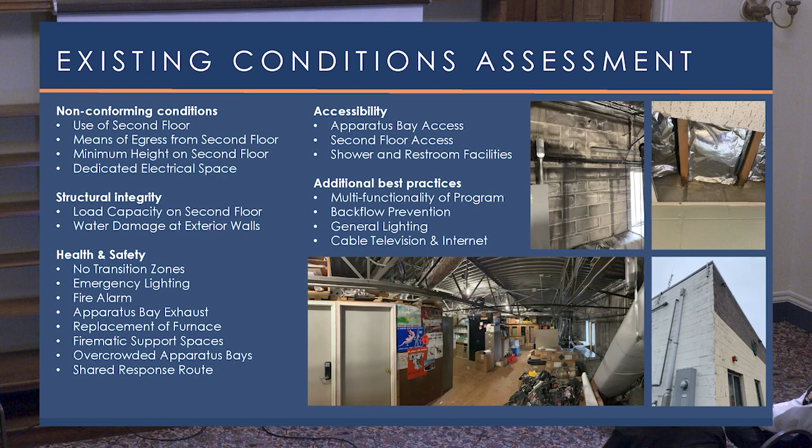So from a site layout standpoint, the current fire station exists on a shared lot with the highway, water and sewer, as well as access to some residential and commercial tenants in the rear. So there's a lot of circulation that's occurring on site.

From a fire standpoint, as one of the only public safety services that respond from the site, police departments are slightly different. Most of the time they're responding from the road. So fire station, you're responding from the site. So it's critical that we maintain a clear path for those apparatus to safely exit the site and not cross other public, other trucks that might be circulating in and around that site. That's not only a safety concern for those who are also driving on site, but also just to ensure a timely response.

We also noticed there's really minimal parking for the station and call firefighters, so full-time and call, to really support that quick response. And that is really also tied to ensuring that operational safety. Getting to the station and allowing a safe response from the station is all tied together.

The main entry is currently concealed kind of on the side of the building, and if you've never been there, it's a little difficult to know where it is, to know where to go. As a fire station, it is common that you have a walk-up medical or someone goes right to the fire station if they can't get to another medical service or hospital. So making sure that that public entry is clear and identifiable and that there's public spaces right in front of it is also a best practice from a fire station standpoint.

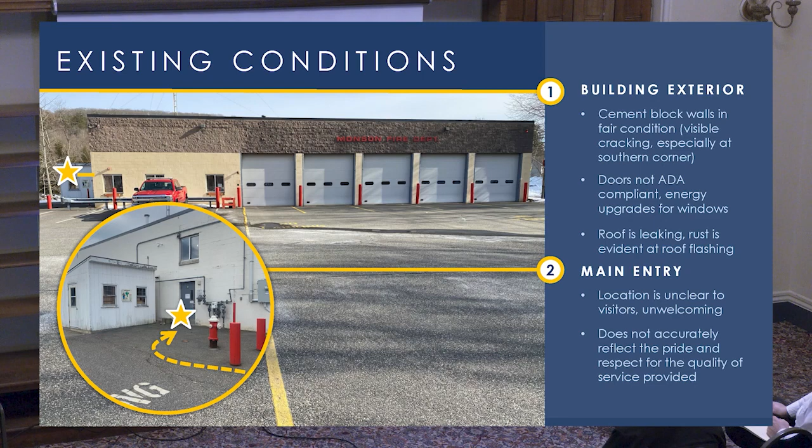Main entry, again, it's kind of located unclear off to the side, and it does not really reflect the pride that the department takes in the service they provide to the community. It's right next to all of their utility connections, and again, it's really just a side door. And that is something that we talked about many times during programming, ensuring that the facility supports the pride the department takes and the service that they provide to the community as well.

Building interior, so again, a lot of the rooms have multiple uses just due to lack of space. One example of this is the current training room is also the day room, which is also the kitchen, which is also the officer report area, which is also the transition zone into the apparatus bay. So having all of that multifunctionality in one space can be hindersome. Example, our committee holds its meetings in that room. There are firefighters in the rear of the room trying to write reports or maybe use the kitchenette, and that's also the space that they hang out in as well. So that multifunctionality pushes the envelope of when too much program is shoved into one type of space.

The second floor, again, we talked about the low ceilings and a lot of those additional uses having to be fit out on that second floor. So for example of what type of space is on that second floor, currently you have living quarters. This is a really low ceiling height, and I'm personally a little tall, but it felt very low to me. It is below the code minimum, so it feels cramped up there.

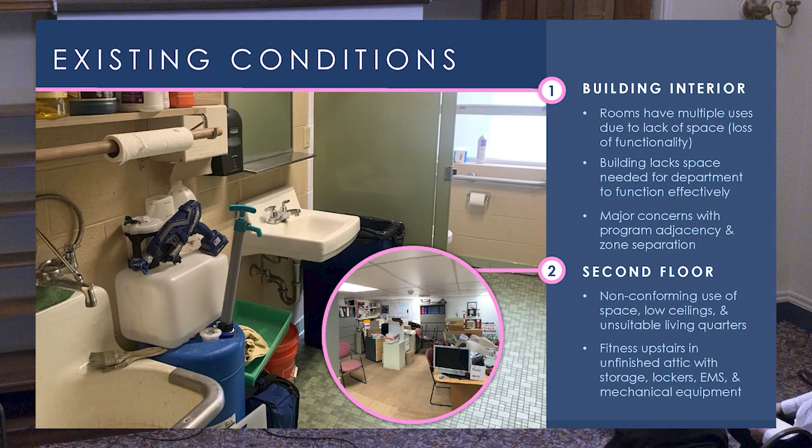They have living quarters up there. They have office space up there. They have a small fitness area. They have all of their storage for firematic support equipment. They have mechanical equipment. They have lockers for records. So there's a lot of use up there because the space just currently does not exist within the station.

They've got SCBA fill stations, which is where they're filling their oxygen tanks out on the apparatus bay floor. That is one of those support functions that we do not want to see within that hot zone. We want that as a separate space, isolated from a ventilation standpoint, so you don't get any of that cross-contamination. Same with the turnout gear. That's the clean gear that you're putting on your body. That should not be sitting out within the bay.

So another thing we noticed here is not only the close quarters and operations around the vehicles, but also getting separate support spaces for those different operational support items. Okay. Oh, I just want to mention one more thing. Most of the bays are not drive-through bays. So if you notice on the front of the station, there are multiple overhead doors. On the rear of the station, there are 2 overhead doors. So I think 2 or 3 bays are not drive-through bays. So there's support spaces behind them.

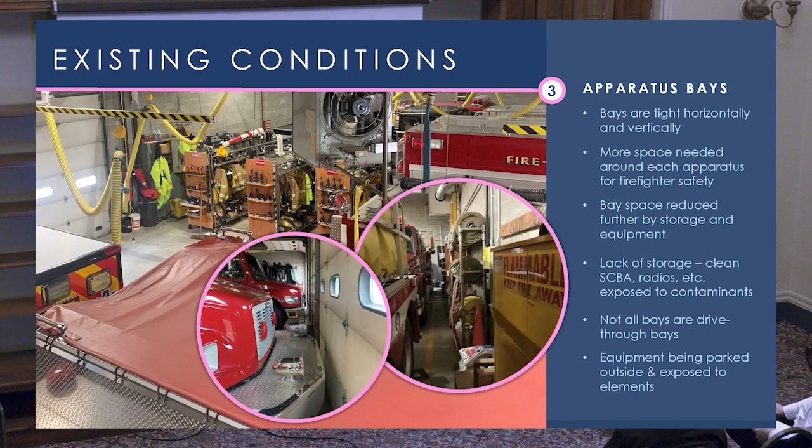It also requires kind of moving around of vehicles and equipment to get anything out. So there are different approaches to response, and whether you can get back-to-back approaches so you can actually respond out of the rear of the station, but that requires that response route to not come straight out the front. You've got to kind of loop around the back. So again, just thinking about how the total operation works on site and how that flow within the bays is working as well. And that's important because there's a lot of different types of calls that the fire department is responding to. They need different types of equipment to respond, and that configuration plays again into that quick response to site.

So the first part of this study really focused on a big picture, total program, part 1 and part 2. So part 1 was really if we go with a full programmatic need, what would an addition renovation solution look like, and what would a new construction solution look like? Both of these were presented to the select board and just seemed to be too much for the town to digest. It was a large investment, and we were asked to come back for a part 2 and look at prioritizing the program and coming back with some more financially feasible options. But I did want to touch on the 2 options that were created.

This was going to give proper apparatus bays at the current best standards to the current size in a drive-through configuration with support space, as well as a large 2-story addition to really pull all of that office functionality, living accommodations, and again, more support space along the apparatus bay out of their current footprint. We're also reworking the site to supplement with parking and coordinate with a few of the other cut-throughs that existed, but really pull the firematic response away from that other public circulation and give a clearer route off-site.

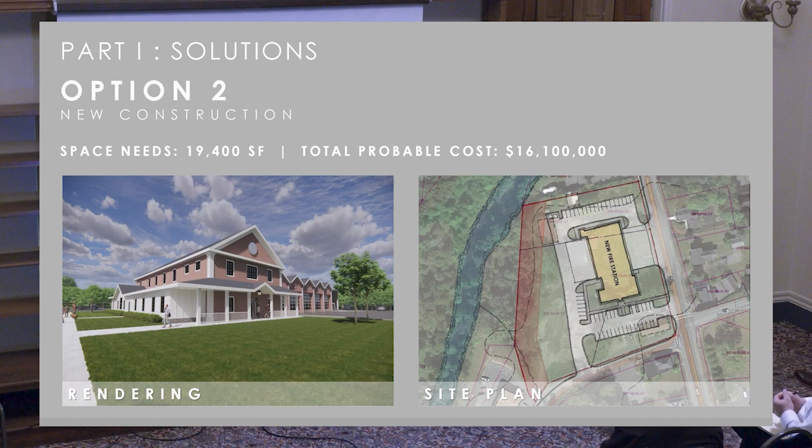So as a part of part 2, we really looked back at that program. So again, the total space needs as a part of part 1 was 22,590 square feet. So in those 2 previous schemes, we're sitting right around that 20,000 square foot mark. The site needs sitting around 1.58 usable acres. So when you take that and you compare it to the existing site, you've got already a lot of existing constraints. And what our program was telling us after discussion with the department is that would be our site needs

and our space needs. And one thing to note is that program allocation, we do a study that looks at what makes up most of that program. When you think 22,000 square feet, that can seem like a big number. Well, about 60% of that is mission critical space, which means it's space directly tied to their operations. Apparatus bay, firematic support spaces. It's not offices. It's not those types of spaces. So that has less flexibility because their size is very much determined by the current equipment owned by the town and all of those different components of their operation.

Now, 27% of that is the building, what we like to call basically what makes the building work. So it's the wall thicknesses, the corridor spaces, it's the mechanical space, the electrical space. It's all the spaces that are necessary to create a functioning building. And then only 14% of that was actually office space. So again, just giving you a feel for, if you take that 22,000 square feet and break it up, what were the main components?

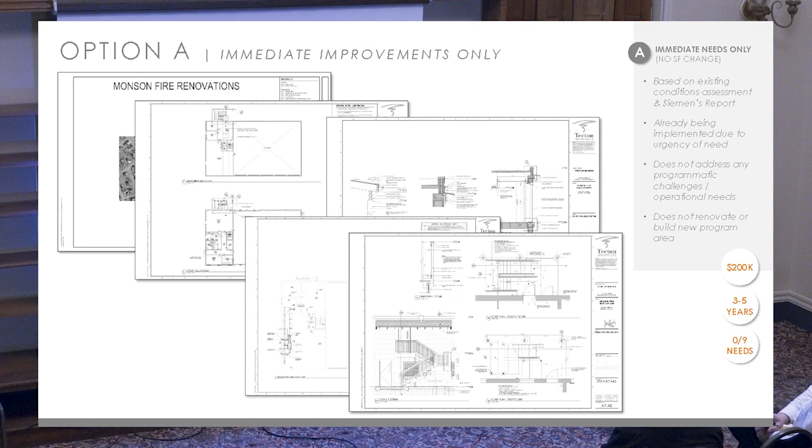So this just recaps those immediate improvements that we're currently pursuing and was previously approved at Spring Town Meeting for the department and town to move forward with. So again, it does not renovate or build any new programmatic area. It does not address any of the challenges or operational needs. It's really just being implemented due to the urgency of the need and also to repair that existing town asset. So, option E.

So this is the option we're currently moving forward with. So we've got a two-story addition located here. You've got the existing station located here in the center, and then you've got this medium bay addition here to the side. So this two-story addition is around 5,500 square feet. You've got a renovation of the main floor of the existing station. So there's about 1,800 square feet of office type space. That's their office, bathrooms, radio, training, kitchen, day, dining, report. Basically that whole main floor comprises this area of the building here. And then the apparatus bays themselves. So we'd renovate those slightly. And then we'd have the medium bay addition at the end.

So from a cost standpoint, a lifespan standpoint and a need standpoint, escalated according to our new schedule, the price is sitting at $8.6 million for this solution, total project cost. And that would support the department for the next 30 to 35 years. The full program that we had previously presented would support the department for 50 plus years. So that gives you the difference of time spans that we were looking at. We were looking at what will support them for the next 5 to 10 years, all the way up to 50 plus years.

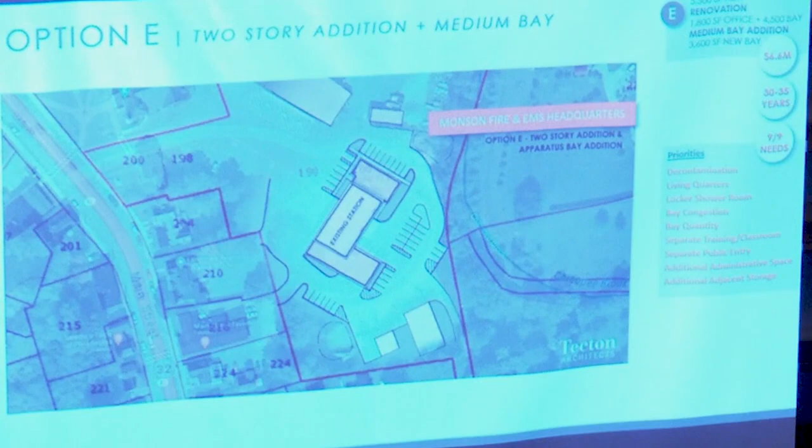From a needs standpoint, this solution did meet all 9 priorities. It did not meet the full programmatic ask from part 1, but it did meet all of the 9 priorities identified as a part of part 2 of the study. Again, those priorities being: it solved the decontamination, solved the living quarters, it created a proper locker room, shower room area, it resolved bay congestion by adding on some additional bay space, and bay quantity by allowing some of that equipment to swing inside. Now it doesn't upgrade and resize any of the existing bays, so all of the existing bays remain as is, but there is one additional bay that would be sized appropriately, as well as pulling all of that firematic space out of the bay to increase that circulation zone around the existing equipment. It separates out the training classroom area and a separate public entry, as well as some additional administrative space and adjacent storage.

So, from a floor plan standpoint, I know this is a little small on your screen, so I'm going to walk up and try to use the laser pointer to walk everyone through it. So the main entry, the face that everyone sees when you pull into the campus, is at the bottom of the page. The existing station is this gray tone box that sits right in the middle of this floor plan. As you walk in this main entry area, you've got an administrative assistant, and you've got 2 supporting offices off to the left. This would be for your deputy chief and your chief.

As you come in, you're greeted by a circulation stair that would go up into, again, this is that 2-story addition, so that would go up into all of your living quarter spaces and those office accommodations. If you come into the station, you have an elevator that would also, making sure that the station is fully accessible, lead you upstairs, as well as some additional storage support space adjacent. At the end of the hall, you have that separate community classroom training space that could be utilized for all of those different functions that we discussed earlier.

If you were to come back to the main lobby and turn to the right, this would be more in support of the operations. So you've got your day captain's office, your radio room, then you've got some supporting public toilets, as well as some toilet shower rooms that are immediately adjacent to a proper turnout gear space. So this footprint right here, where you see these lockers, is actually the existing classroom training room space. So we're taking all of those turnout gear lockers that sit out on the bay and take up a full parking stall, and moving them into a proper separated turnout gear space.

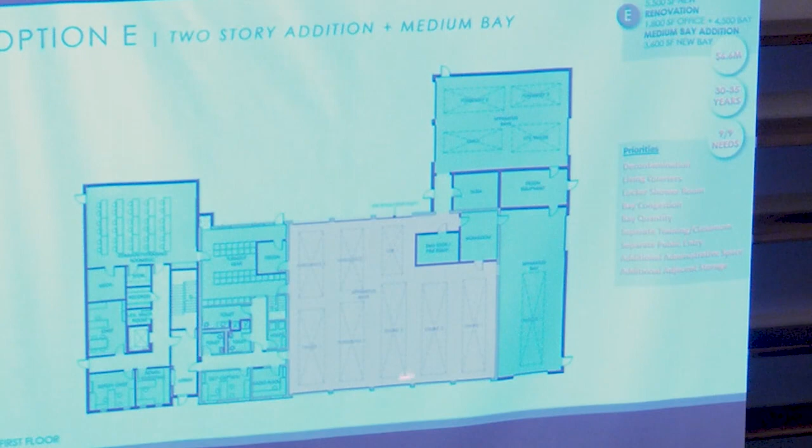Up on the second floor, so again, up on the second floor here, you can see this mezzanine here between. You've got open to below here, open to below here. This is that separation that we've created with the addition. So this would be the second floor of the office living quarters addition, and then that existing, what was always supposed to be a storage mezzanine, mechanical mezzanine, would go back to being that type of space.

So it would just house all of that utility storage, necessary mechanical equipment necessary to properly ventilate and exhaust this space, as well as support the new addition. So when you come up that stair, you remember the stair and elevator on the first floor, so when you come up, you're kind of in this smaller vestibule area.

When you come in, again, we've separated out all of those report functions, kitchen functions, day room functions, dining functions out of the training classroom area, and that's a separate space here. And then just adjacent to that, you have 4 bunk rooms, which is what meets the current need of the department, as well as 2 supporting toilet spaces.

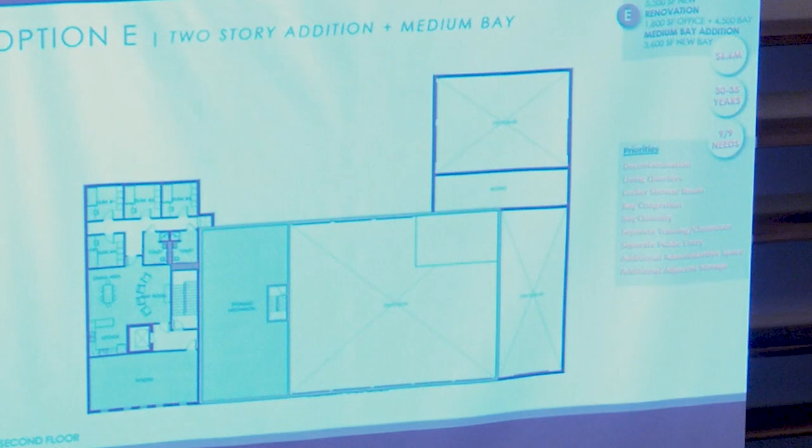So these are just like what you'd have at your house. It's a toilet, a shower, and a sink, and they're unisex, so that limits the amount of fixtures that are necessary. So any firefighter staying in these bunk rooms could utilize either one of those shower facilities. And then a small fitness area to relocate their existing equipment and give that a proper home for, again, a lot of that training and exercise.

So from an exterior standpoint, again, this is looking at the front of the station. So this is that existing portion here, the overhead doors that exist today. This would be that medium bay addition. You can see the height differential between this type of bay and this bay here, as well as the 2-story addition.

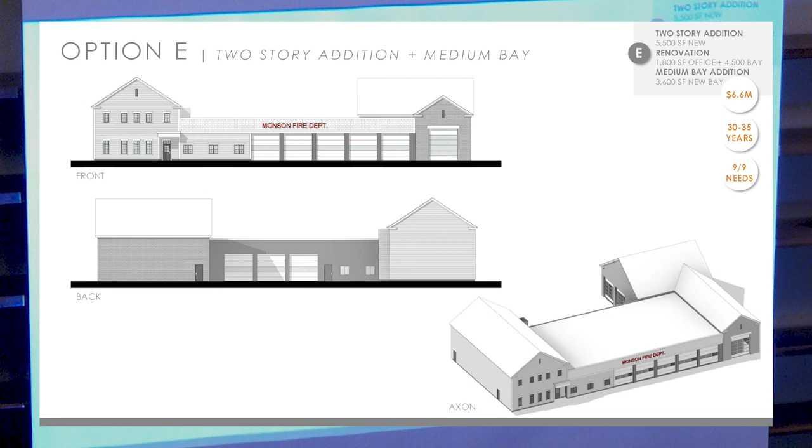From a materials standpoint, we are again looking to be financially responsible, but as well as thinking about durability and maintenance. Whenever we're designing a municipal facility, we're going to be very conscious of how long these materials are going to last. They need to last just as long as the facility supports the department, as well as making sure that the maintenance on them isn't a high load or a heavy lift for the town to accommodate.

So we're looking at a cementitious siding, so similar to what you'd have on your house, but it's a little bit more durable, on this addition here with some punched windows, fixed windows here, and then just trying to clean up and veneer the exterior of the existing building to try to tie it into that.

So we've got CMU construction. CMU construction is actually typically our main backup wall system for a new facility we would build. So you have all the durability on the inside, but we fur that out with exterior materials, proper insulation so that you can meet the current energy codes in place in Massachusetts. We would go with more of a traditional block construction for the apparatus bay space, again, to just be financially responsible and minimize the need on the rear side of the site.

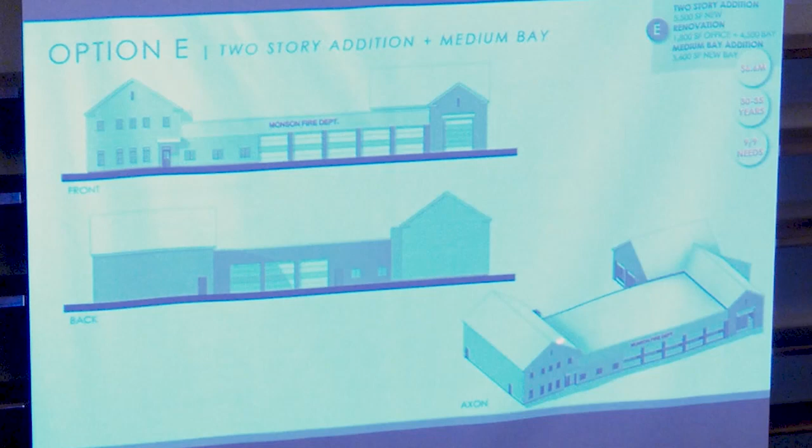So it just gives you an idea of what this could look like. We would obviously have some punched windows that would circulate around to tie with some of those, but we just wanted to give you a quick visualization of what that would look like.

So we now can dive into the cost. So it's a 2-story addition. So option E is a 2-story addition plus a medium apparatus bay. So the total square footage for the entire solution is 17,200 square feet. Now that includes space we're not touching, but that's the total existing building plus the additions. So we have the new addition, which is the 5,500 square feet. That's the 2-story office and living quarters addition.

We then have a renovation of the existing portion of the building on that first floor, so that's about 1,800 square feet. And then we'll renovate the existing apparatus bays, clean them up, and ensure the finishes again are of that same durability and maintenance that we're looking for in the rest of the facility. We're going to have to handle exhaust and a few other improvements to the systems.

So there's about 4,500 square feet of existing bay space. The existing utility mezzanine is really to remain. We're not touching that. We would just be removing the programmatic elements from it. And then the new medium apparatus bay addition of 3,600 square feet.

So when we look at an opinion of probable cost, we look at 3 different buckets of money because we always want to talk about the total project cost. The first bucket is your construction costs. So that's your brick and mortar. That's the number that you'd receive from your general contractor. That's your bid number, essentially. Now that number has a lot of different pieces to it, but that's your hard construction costs.

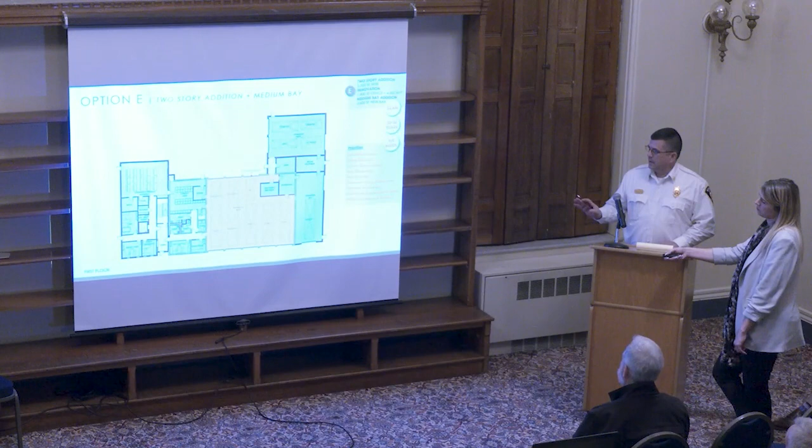One other thing that was asked at the previous meeting that I just wanted to touch on, and maybe one of your questions, is it was asked at the October meeting why the one size fits all room wasn't adequate. Why couldn't we go with a 1-story addition over the 2-story addition? As Rebecca stated, we're hosting many meetings down at the station.

We have our building committee meetings, we have fire department trainings, we have Girl Scouts, we have Boy Scouts, Summerfest committee, the Lakeshore Association, a bunch of civic groups that come and meet there. And we love having people, and we would love to host as many meetings as we can.

The problem is, when those meetings are taking place, our full-time staff, even our on-call staff, when they come back for calls, we have no place to do our work. So the current model isn't working now, so it's not going to work in the future. That was definitely one question that was asked at the last meeting, and I just wanted to comment on those. Were there any other questions?

Good. One of the things, after you build it, you have to maintain it, you have operating costs. Are they ever looking at rooftop solar? Electrical usage would come back with the drying equipment and everything. What happened to that? So I'm just going to repeat the question for the recording. After the project is built, there's the operation and maintenance cost of the facility and the potential use of solar panels on the roof to offset some of those utility costs.

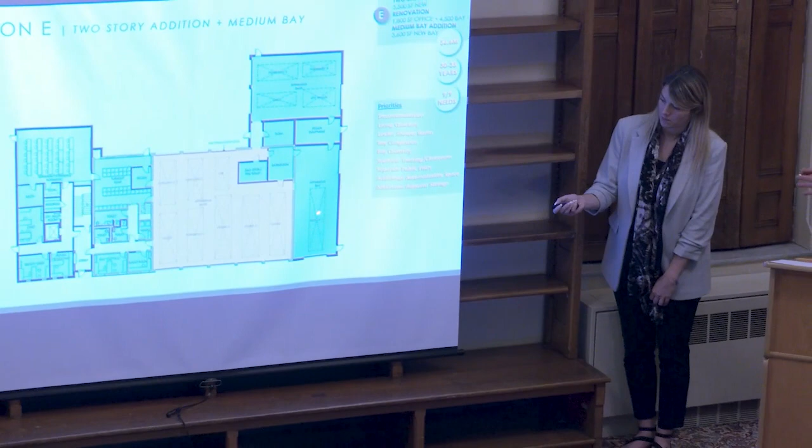Any additional questions? Oh, follow-up, absolutely. So I have a follow-up to the question about the trailers. As Jeff was saying, when we do the addition to the apparatus space, we might be able to move apparatus around. So I envision this question might come up again in the future. Would it be possible to build the new addition on the left, move staffing over there, and then eliminate the trailers? Sure.

Do you currently have any vehicles that are left outside now? Yes. Let me make it up here so you can hear me. We have 1 brush truck, 1 trailer with a UTV inside of it, a pickup truck, and then the chief's car all sit outside. They all sit outside? Yes. Are they fairly new vehicles? The brush truck is a government surplus vehicle that we acquired for free. We put about $20,000 into it to convert it into said brush truck.

The pickup truck is a 2015 that was roughly $40,000. My vehicle is a 2020, and that was roughly $45,000. The trailer and the UTV are about 2003, and those are on the schedule to be replaced with ARPA funds. We have 2. 2 vehicles? Yep. And they're all in the garage? Correct. So all of this will house everything? It would get every single piece of equipment inside, correct.

And you're happy with the sizes of those existing doors? We can't change them. You just cannot combine those? Not unless you knock the building down and redid it, which would be back to the 16 million. I see.